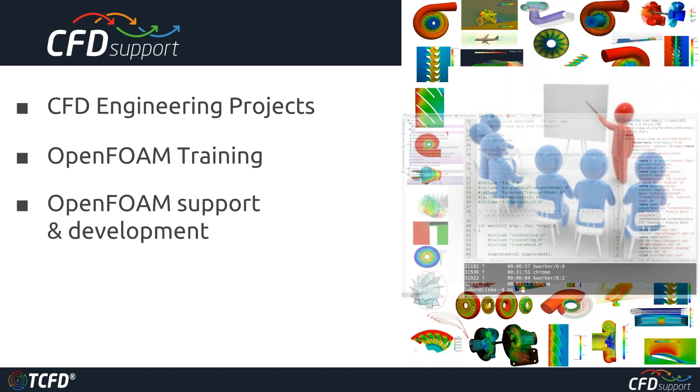Quickly about CFD Support. CFD Support is a private engineering company dealing mainly with computational fluid dynamics. We are located in Prague, Czech Republic, and we deliver complete CFD projects. We do various projects on demand all across the CFD field. We also deliver extensive OpenFOAM training and consultancy, as well as OpenFOAM support and custom code development. And of course, our flagship product is TCFD, which this webinar is about. So this is just quickly about our company.

This brings me to TCFD. Please let me give a brief description. What is TCFD? TCFD is a comprehensive high-tech CFD code. It's designed to be a complete CFD workflow to cover all the engineering steps, from the pre-processing over the simulation run to the very detailed post-processing of the results. It's independent of any other software, and on the other hand, it's fully compatible with other software. For this reason, it can be easily integrated into an existing process chain in any organization.

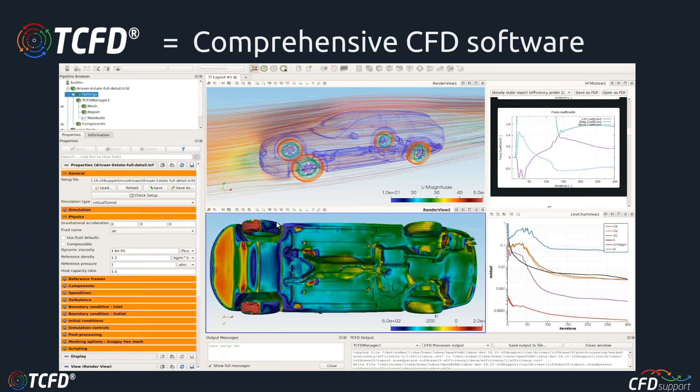So TCFD is unique CFD software, which is focused and unlimited. It's very progressive because it successfully merges the benefits of open source - it's perpetual, unlimited for users, jobs, and cores, and it's also very flexible and customizable - with the benefits of commercial codes, like professional technical support and graphical interface. It's robust, accurate, automated, well documented, well tested, and it's ready for the industry.

So the user can simply put the data in, TCFD does its job, writes down the results, and in the end the user can pick up the final report. So that's it - TCFD can be used either as a black box, or it can be used as a fully sophisticated CFD code where all the options are open. So the beauty of TCFD is it's the user who decides how deep to dive into CFD, or not at all.

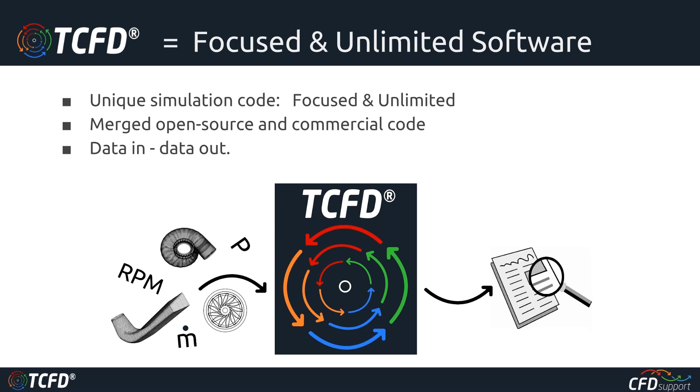About the applications of TCFD: TCFD is always focused on particular workflows by particular applications. TCFD's core business has always been turbomachinery simulations, both radial and axial machines, both compressible and incompressible fluid flows. So, for example, pumps, fans, also turbines, compressors, hydro turbines, and, for example, wind turbines, and many other kinds of rotating machinery.

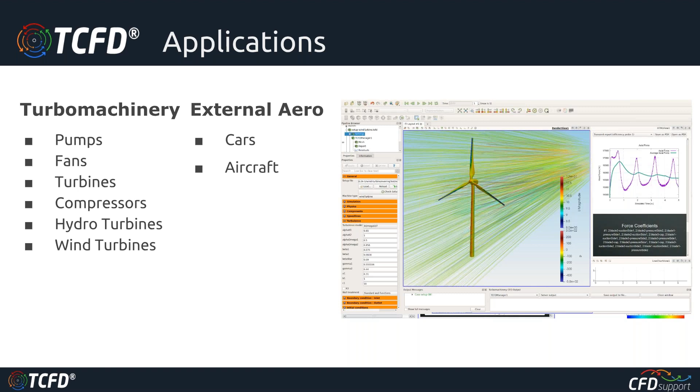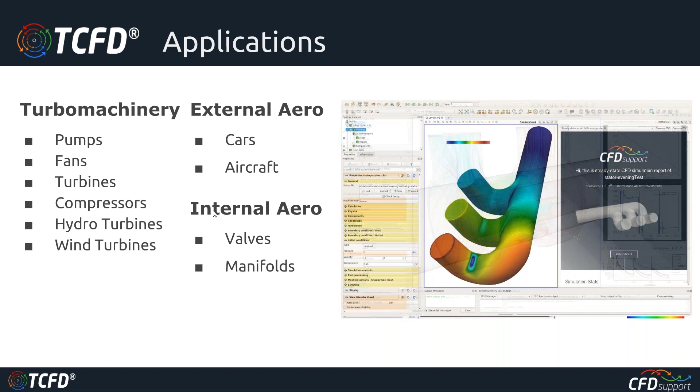Later, we decided to extend what had worked so well in turbomachinery to external aerodynamics. So now TCFD can simulate cars, aircraft, and many other external flows. It can also simulate internal flows like valves, piping systems, manifolds, and many others. And it can also simulate, for example, ship hydrodynamics like ship hulls with propellers. So TCFD is always focused on particular engineering workflows. That's very important.

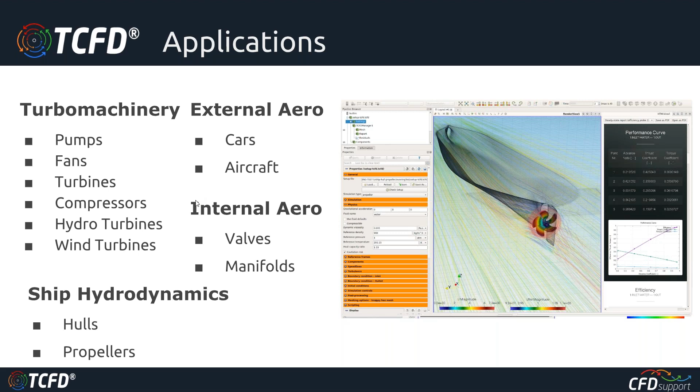Please let me stress just a quick review of TCFD's unique value. We believe TCFD is unique for at least these reasons. Number one, TCFD is unlimited, which means our clients can keep TCFD forever, and they can use it for an unlimited number of users, jobs, and cores. This gives the investment into TCFD a permanent value. So our clients can scale their CFD simulations in a really big way. TCFD is fully automated, so TCFD is extremely effective for this reason.

We have really good technical support, and real preset tutorials are included. Currently there are exactly 22 tutorials based on the real machines and the real projects we did in the past. So the new TCFD user has no doubts about the best practice settings and how to start. There are some other technical details. I will go quickly through them.

TCFD is available for Windows and Linux operating systems. TCFD has its graphical interface in ParaView, and nowadays 100% of the workflow can be done in the graphical interface. Of course, batch mode is available as well, so anybody can run TCFD in the background in batch mode. TCFD is also scriptable, so if someone wants to script it into big loops, it can be scripted in Python. Importantly, TCFD has its own automated meshing system based on snappyHexMesh, and external meshes can be imported to TCFD as well.

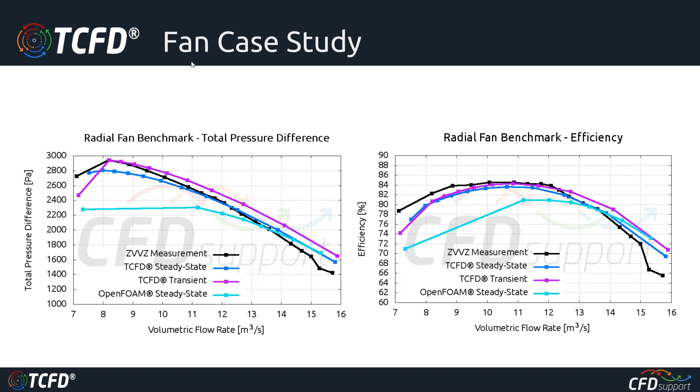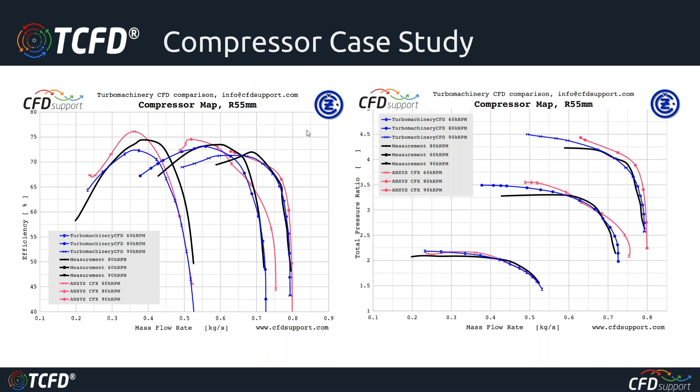So in the last year, TCFD has been extended with new applications. Recently, we made TCFD able to simulate external aerodynamics. We made a complex TCFD study of the DrivAer car. We found the CAD model and also the original measurement data to compare with the simulation results. The agreement with the measurement was very good, and the detailed PDF study again is available if you would be interested in details.

And finally, we have an optimization study. We did this study together with our German partner Friendship Systems, who developed their product called CAESES. CAESES is a flexible CAD platform for fast and comprehensive design studies with simulation tools. And together we made this study on a fan simulation

where the optimization study was performed. Many designs were generated in CAESES and simulated in TCFD. And as a result, we've got an optimized fan model with higher efficiency. The detailed PDF paper is available on request, so feel free to ask for it.

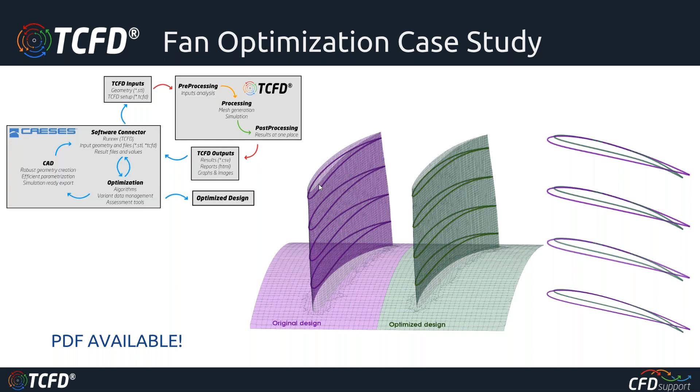And yeah, so here we go. Now it's time for a live example and new 18.10 version capabilities. So Radek, are you ready? Can I hand over the presentation to you? Yes, I'm ready. So you can pass me the presentation, show my screen.

Okay, so thank you, Luboš, for a very nice overview of TCFD. My goal now is to introduce you the biggest news in TCFD 18.10. I hope you can see my screen, and if so, let's start the second part of this webinar. So what is new in TCFD? With this release, we are officially entering external aerodynamic simulations. For this purpose, a new simulation type, virtual tunnel, is available. Additionally, we present a new tutorial, which is called DrivAer, showing the best practice setup for typical external aerodynamic simulation.

Over the last years, we registered significant demand for multi-rotor simulation. Therefore, we have developed a new framework for multi-rotor simulation, which is set using the reference frames section. And we added additional features such as axis of rotation visualization, which helps the user to manage the setup of several rotors. And of course, we provide a new tutorial describing the best practice setup for multi-rotor simulation, which is called the double rotor axial fan tutorial.

We have improved the simulation reports. Users can now individually set sections to appear in the report, so they can choose sections or quantities in which they are interested, and the report or reference quantities can be checked and afterwards appear in the final report. And finally, the improvement of the reporting lies in adding aerodynamic forces and coefficients, which are now automatically evaluated and reported.

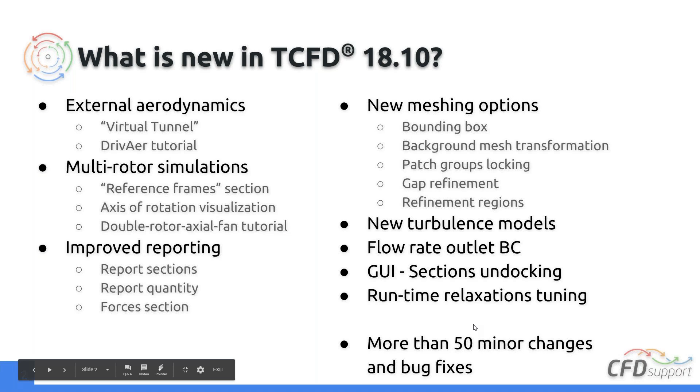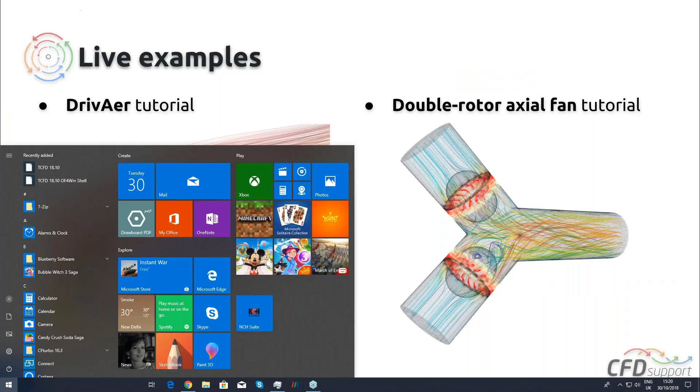Okay, so during this presentation, I will be switching between these slides and live examples in TCFD to really see that it works and it is really implemented. I'm going to demonstrate some of the new features on these two tutorials. The first one is the DrivAer tutorial for external aerodynamics, and the second one is the double rotor axial fan tutorial representing multi-rotor simulations. So I will be switching in this way. Sorry, not in this way. So this will be the DrivAer tutorial, and here I have loaded into TCFD the multi-rotor double rotor axial fan tutorial.

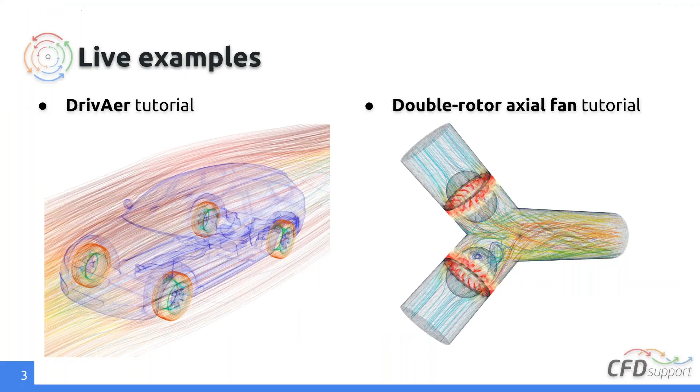So within the new release of TCFD, we have introduced 3 new tutorials. One of them is this DrivAer tutorial showing a typical example of external aerodynamic simulation. The DrivAer model was developed, measured, and studied at the Technical University of Munich. The CAD geometry is published at these web pages and can be downloaded for independent studies. So therefore, there are many studies and real measurements perfectly suited for validation studies.

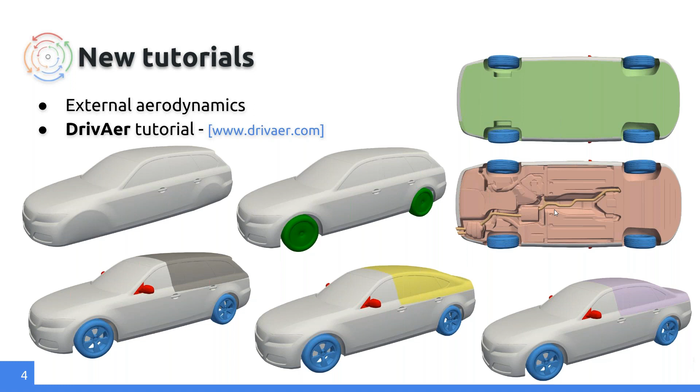And moreover, many variants of the body are available as well, so the solver and the software can be really deeply tested. So for example, there are many body shapes like estate body, fastback, and notchback. You can combine any part. So you can, for example, use a smooth underbody or very detailed underbody with the exhaust system, as well as choose the smooth tires or really real shaped tires and so on. So this is a very nice and playful tutorial.

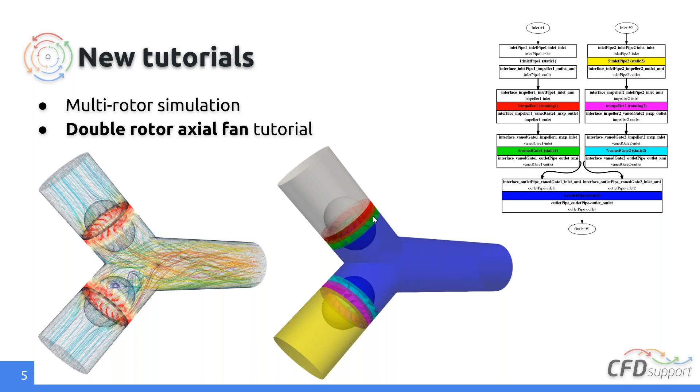Well, the second tutorial is focused on the multi-rotor simulation. It consists of two rotors, two stators, and 3 piping sections. So quite complex geometry, showing that really complex geometries with unlimited number of rotors can now be simulated in TCFD. And the last is an example of internal flow. It is a simple hydraulic valve tutorial showing the ability of simulating internal flows.

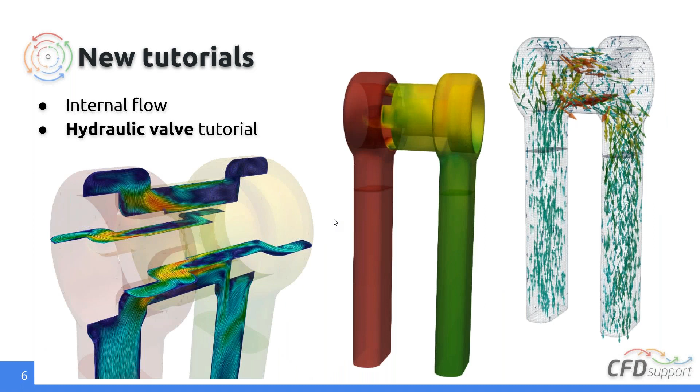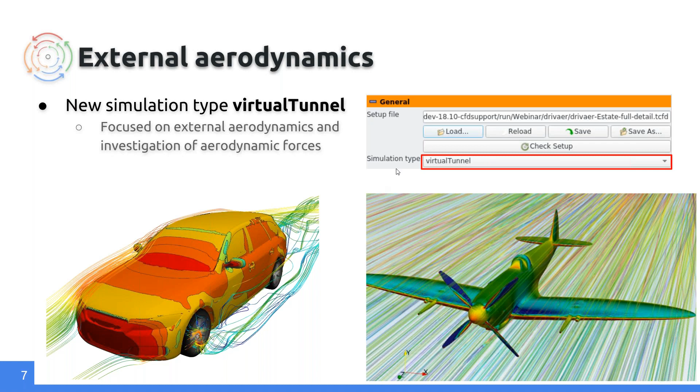Okay, so let's start with the external aerodynamics. What is new? I'm going now to introduce these new features one by one. So first one is the new simulation type called virtual tunnel. It can be used for investigation of aerodynamic forces acting on any object, so typically in car industry, aerospace, etc. So this new workflow gives user all the tools needed for successful CFD simulation.

So therefore we developed new meshing options. We implemented unlimited number of rotating regions. So it means for cars, for example, that rotation of car wheels can be simulated as well now. We tailored the evaluation process for evaluating aerodynamic forces, and of course these forces will then appear in the reports.

So just simply go here. So this is a TCFD graphical user interface. All the setups can be done using these sections. And for example, the first setup you should do when you start setting up the case is to choose the simulation type. So for this external aerodynamics, we will choose now, for this case, virtual tunnel, for example.

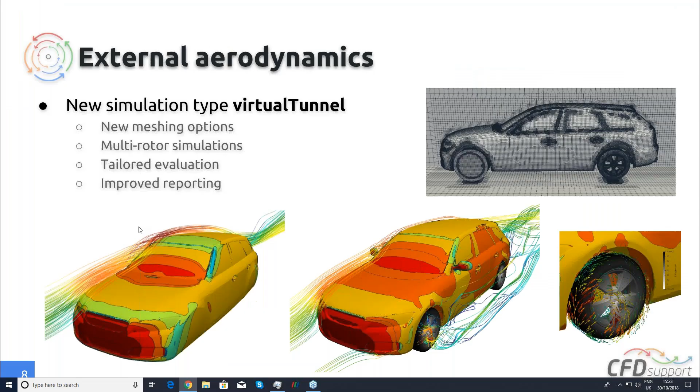So the next big feature which is implemented is the new multi-rotor simulations, which brings unlimited number of rotors with different rotation speed and axis. The rotation is applicable for both steady state and transient simulation. And the key part of the setup is the reference frame section. This reference frames approach defines each frame, which holds the information about the axis of rotation, or in case of the static segments, the rotational transformation of the segment, and of course the rotating speed of the particular part of the geometry.

So inside the GUI, inside the TCFD source, we can find a new section which is called reference frames, in which we can define as many reference frames, rotating or stationary, as we need. For better frames management, of course, we developed automatic axis of rotation visualization. So anytime you click on any frame, the axis will be visualized.

So let's see how it works. As you can see here, we have the new section reference frames, in which we can define as many reference frames as we want. For example, here we have 2 rotors, this pink part and the red part. So frame 2 represents the rotating region, so I can define the name, axis of rotation, point on the axis, and check if this frame will be rotating and at which speed it rotates. Anytime you change something, you can see how the axis looks, which makes the work with TCFD very, very easy.

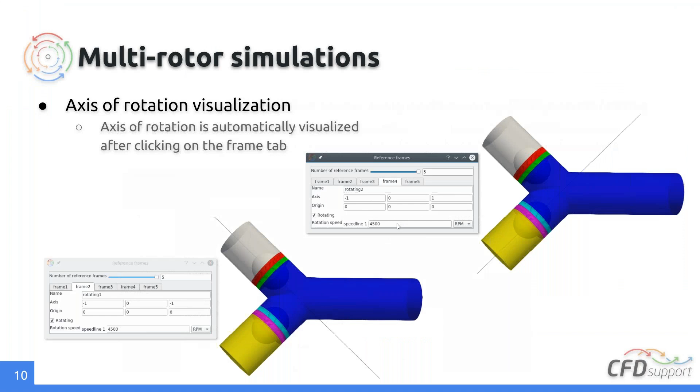Okay, let's go back to the presentation. So when the reference frames are preset, then in the component section, the frame has to be assigned to the components, which basically defines the rotation of the whole component. The frames have to be also assigned to patches, so you can define both rotating walls in non-rotating components and non-rotating walls in rotating components. So it gives you really high complexity in defining the case.

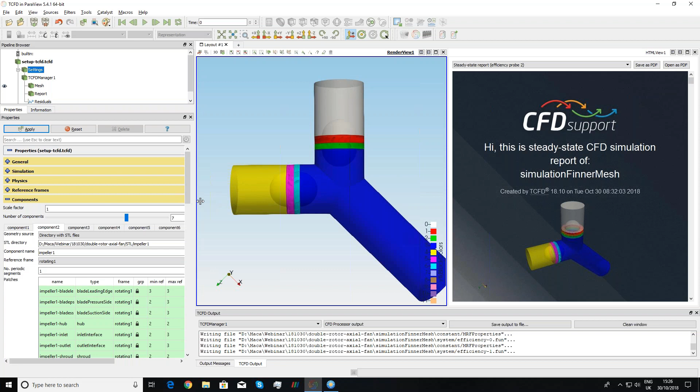So it is depicted here, but we can show how it works live here. So basically for each component, so here we have several components. So for example, component 2 is this rotor. This rotor here, by the reference frame, is assigned to the rotating frame with the name rotating 1. And of course, all the patches are assigned to this rotating frame.

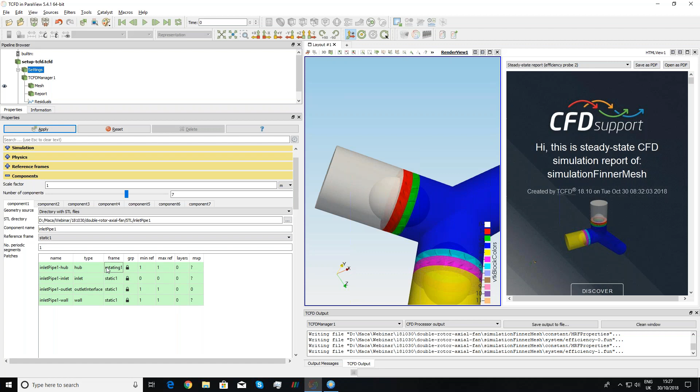For example, if we have a so-called unshrouded rotor part and the shroud is physically not rotating, we can assign this shroud to the static reference frame, and now the shroud is set to be non-rotating. And the same holds, for example, for component 1, which is here. So if we want to rotate this hub part from the rotor, we can similarly assign the hub to the rotating frame. So in this way, we can preset the case and run the simulation.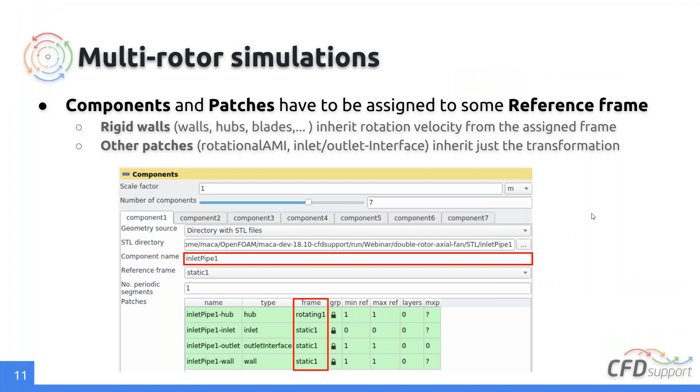So we implemented also several new meshing options. So in case you have no external mesh and you are going to create the mesh in TCFD, we created several new features. So the first one is bounding box, which is a new framework for defining a box-shaped computational domain without importing its geometry. So what does it mean? It means that you don't need any external STL files to define the virtual tunnel, let's say, or the boundary of your virtual tunnel.

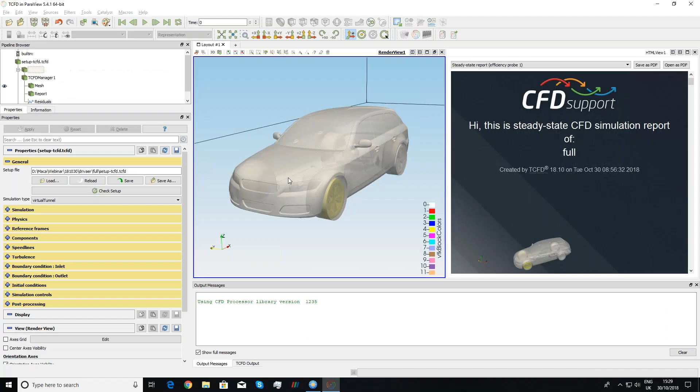So it can be set automatically. The bounding box is available for simulation types which simulate external flows, such as propeller, stator, virtual tunnel, and wind turbine. And what is nice is that the setting of the bounding box is interactive, so you can anytime see what you set basically. So if I go here, this is our setup, so I can go to the components part.

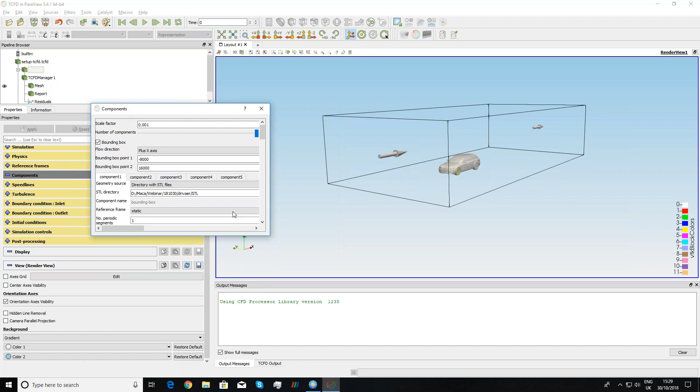So another feature which is implemented in the GUI: sometimes when you have a big and complex geometry, the menu is quite wide. So by middle mouse click, you can undock this section and have a separate window for the setup. Yeah, so you can really nicely adjust the windows to fit your needs.

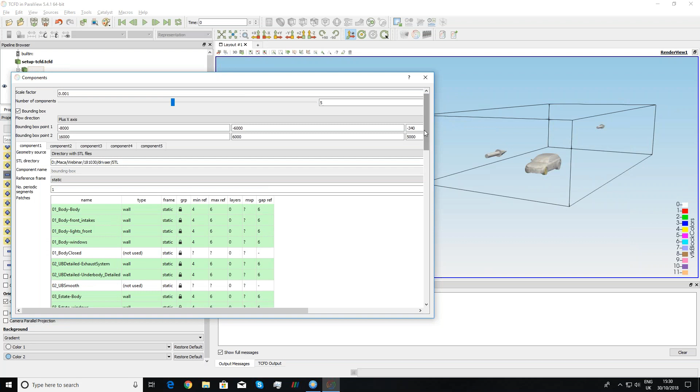And basically here at the beginning in the component section, here is the bounding box checkbox, which enables this bounding box setup. Then you just set the flow direction, so you can choose in which direction the flow will go. It is nicely visualized directly, so you are always informed what you set.

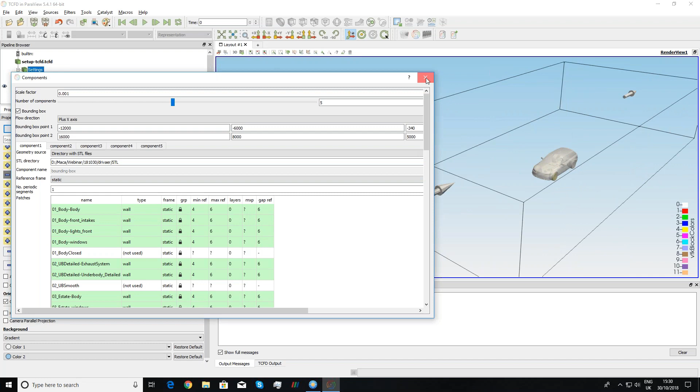And of course, the size or the dimensions of the bounding box are interactive. So if I would like to extend the virtual box, anytime I can really see immediately the shape of the virtual box. Yeah, so this is what we have here for the bounding box setup.

So the next one is the background mesh transformation. For better alignment of the input geometry, we have developed this transformation of the background mesh. For those who don't know what a background mesh is, the background mesh is an initial mesh for meshing. So it is good to align the background mesh properly with your input geometry, and this transformation allows this better alignment. A typical example can be presented on this double rotor tutorial, where the axis of rotation is not aligned with the main XYZ axes.

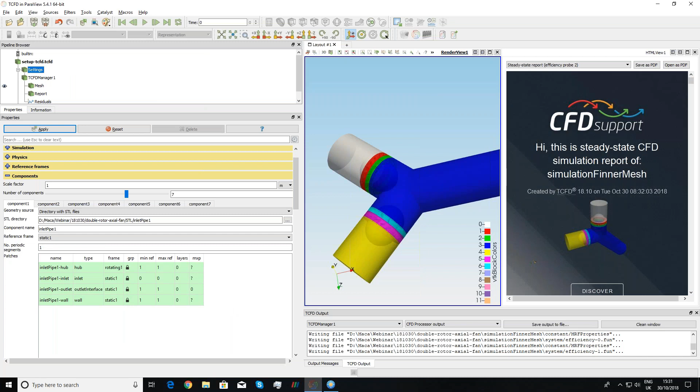So if I go to our tutorial, inside the component section here we can enable this show background mesh, so we can see it is preset correctly, and this advanced rotation is available in advanced mode, which can be enabled by this button. And now there are 3 slide bars or 3 values of the rotation in the Eulerian approach, let's say.

So if we change this beta angle, so this is let's say the default value, which is not nice for this shape of the geometry, so we can really nicely align with our input geometry. So this is a very nice feature, and it can also be applied for cylindrical background meshes, to really align the background mesh with your segment.

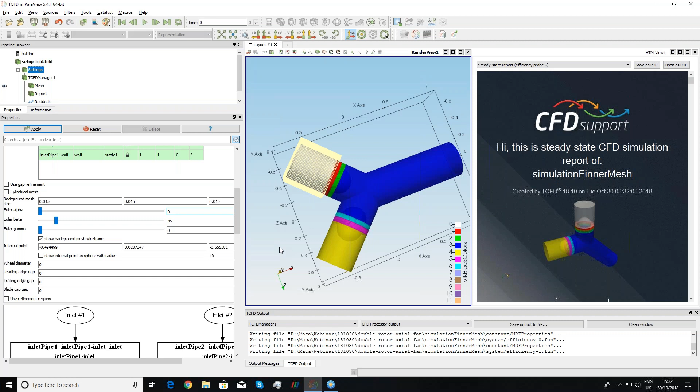Okay, so what is next? The next one is the patch groups locking. So in the previous TCFD versions, the patches of the same type always share the same levels of refinement. So levels of refinement means how fine the final mesh will be. So the new version allows to set the levels individually for each patch without any restrictions.

So it can be done by unlocking the patch and basically set the values. So just to show, for example, now we can go again, let's say for this DrivAer tutorial. So we can see here that all the parts of the car are set as a wall, of course. And now I would like, for example, to change the mirrors. So I would like to make mesh finer at the mirrors part.

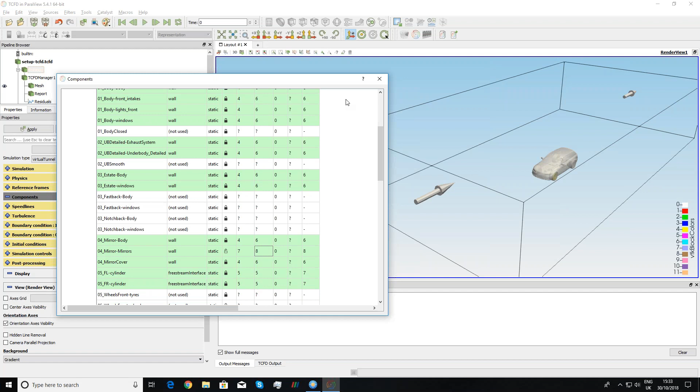But in the old version, if I change here, it changes for all the types wall. So I wasn't able to do this. But now if I unlock this patch, then I can use any number just for this particular patch. So which is also a very nice feature. So now the meshing is much more complex than ever before.

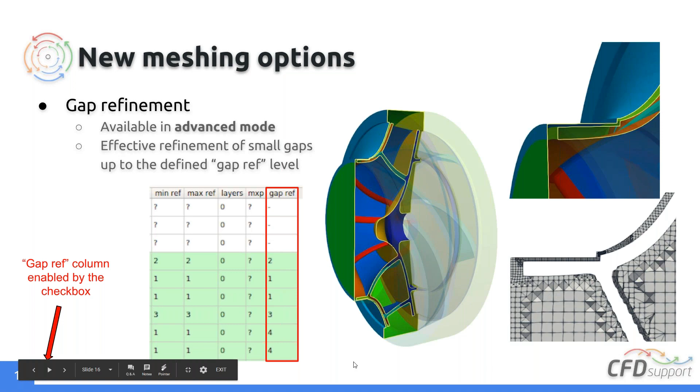Another feature is the gap refinement. So again, it is available in advanced mode. It is used for effective refinement of small gaps up to the defined gap ref level. So if you enable this gap refinement, okay, so maybe I will go here. So if I go for components, here in the advanced mode again, of course, is the use gap refinement, and then a new column appears in this patch list, and you can basically increase this number to really make a mesh finer in small gaps, which is again visualized here.

So a typical example is to mesh a leakage passage, for example, for this radial pump. So this part is always problematic, and it eats a lot of cells to be meshed. So now, for example, if you have only one part of the geometry for the whole casing, then you can enable this use gap refinement, and then you can see that it uses the mesh refinement with respect to the size of the gap, which can save a lot of cells in the final simulation mesh.

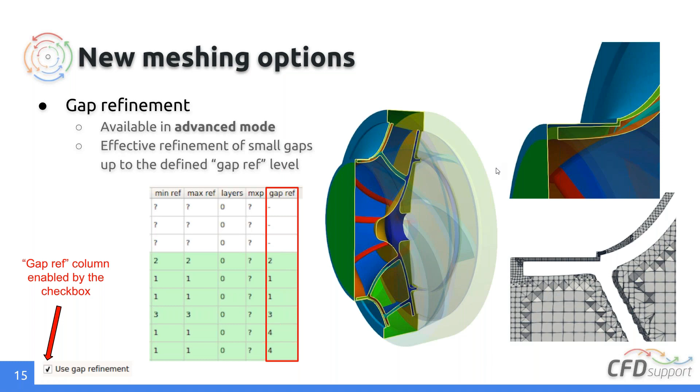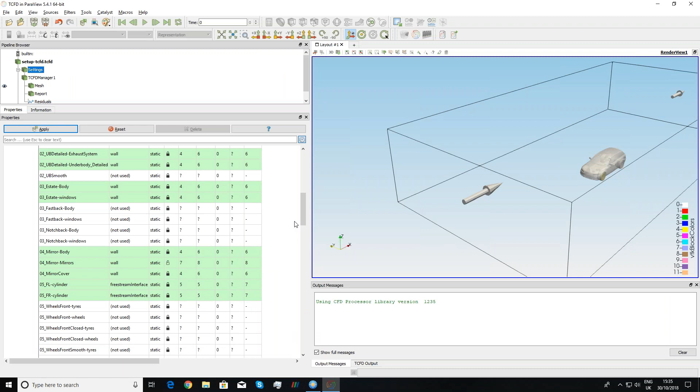And I think this is the last feature from the new meshing options, which is the refinement regions. So refinement regions feature allows defining a simple shaped region for mesh refinement. Typically one needs a finer mesh in the wake area behind the car body or around the whole object. So the user, by clicking on this checkbox, use the refinement regions, can enable as many refinement regions as the user wants. So again, we can show on this example.

So here we have 3 refinement regions with the box shapes, but you can also use sphere or cylinder. So basically you set the dimensions and the level of refinement. And then finally you can get something like this. So refine mesh around your objects and make the mesh coarser apart from your object. There are 2 modes, inside and outside: inside it meshes inside the object, outside it meshes outside from the defined object or defined region.

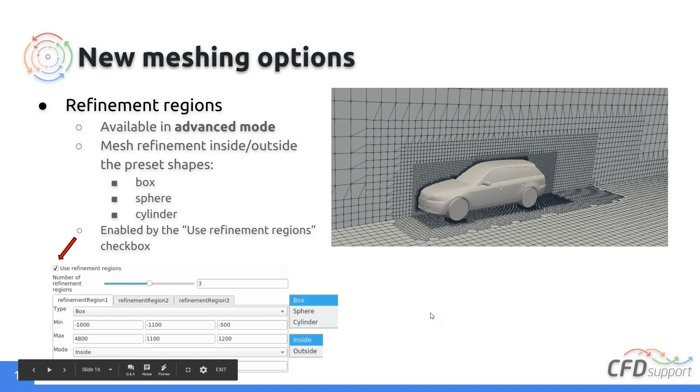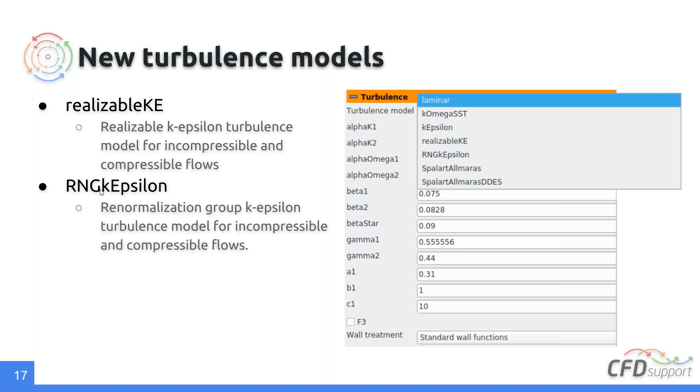Okay, so what is next? So we have introduced new turbulence models directly into the GUI. So now, beside others, you can choose the realizable k-epsilon turbulence model and RNG k-epsilon model, directly in the GUI. For example, you can go here where we have this turbulence, and simply you just choose the turbulence model you prefer. Again, you can also set these advanced parameters in the advanced option. So if I disable this advanced option, then you can see just the turbulence model and wall treatment.

Then we have implemented the flow rate outlet, a new family of outlet boundary conditions. So it is a mass flow rate, volumetric flow rate, and fixed velocity boundary condition at the outlet. Simply just go to the outlet boundary condition section and choose what you need. So for example, for pump or fan simulation, it is clever to set the volumetric flow rate, if you prefer, at the outlet and not at the inlet.

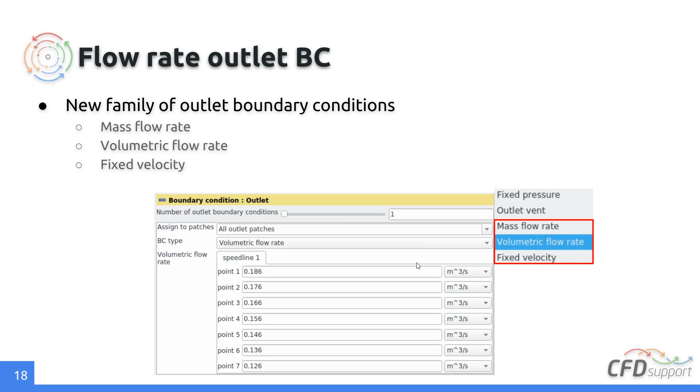Okay, and now we are going to the improved reporting part. So now in the post-processing section, the user can define their own section to appear in the report, as well as the report quantity. So if you enable again the advanced mode, then you can see these 2 new options, report section. So you just choose which section you want to see in the report, and the report quantity. So usually what appears at the x-axis and the reference quantity for the results.

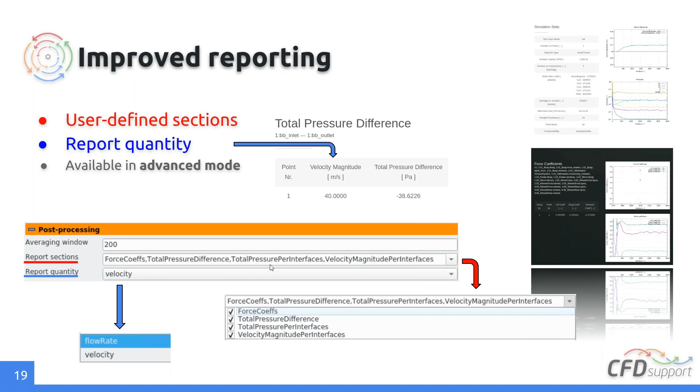And of course, new forces section, because of our external aerodynamics. So forces and force coefficients are very important. So now they are directly visualized and presented in the final report. So force coefficients, forces, and torques.

So we can show the setup and how it looks like. I have preset this final report for the car, and if I go to the setting part, to the setup part inside the post-processing, so basically our report section.

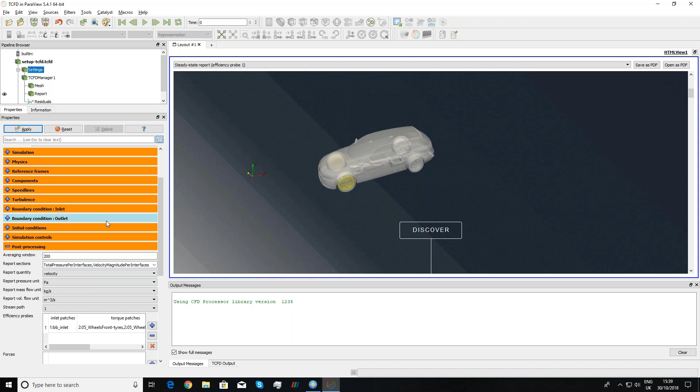Now all of them are chosen: force coefficients, total pressure difference, and total pressure per interfaces, and for example velocity magnitude per interfaces. The reported quantity is velocity, because at the inlet we of course set the velocity. So then it's a classical report in which we can see the force coefficients.

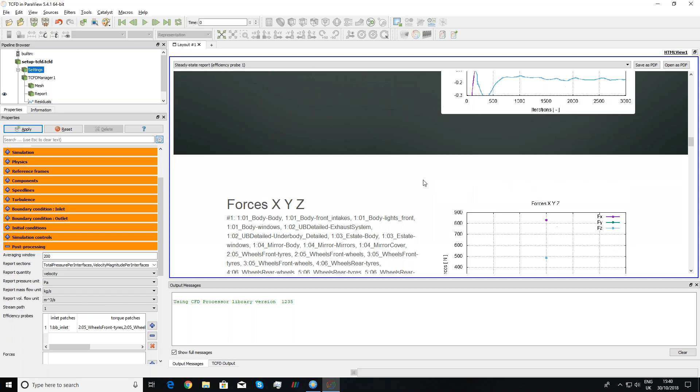The progression, or the evolving during the simulation. So we can also check the convergence, let's say, forces in each main direction, and of our torques or angular momentum along the main axis, and of course the other sections.

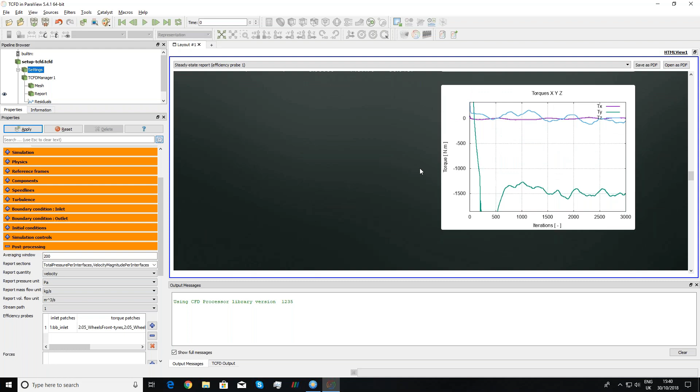So now everything is available at one place, and the same I can show you for the double rotor axial fan tutorial. So again, inside the post-processing, if I enable advanced option, we can see now that, for example, the report quantity is the flow rate.

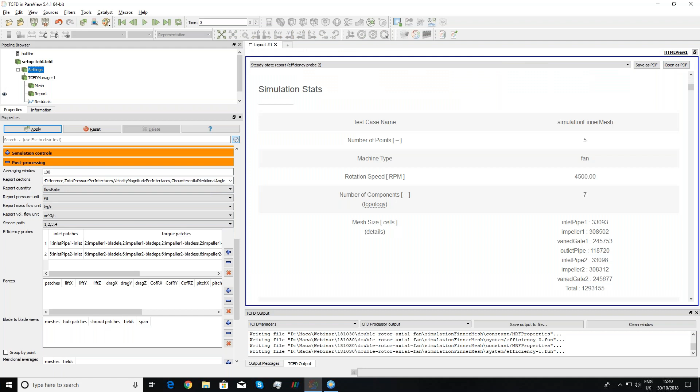So we can go through, and we can see that now for the reference quantity, what we can see here and here in the table are the flow rates compared to, for example, here when we set velocity magnitude. So here we have velocity magnitude as well as in these graphs. This is another option which can be managed by the user.

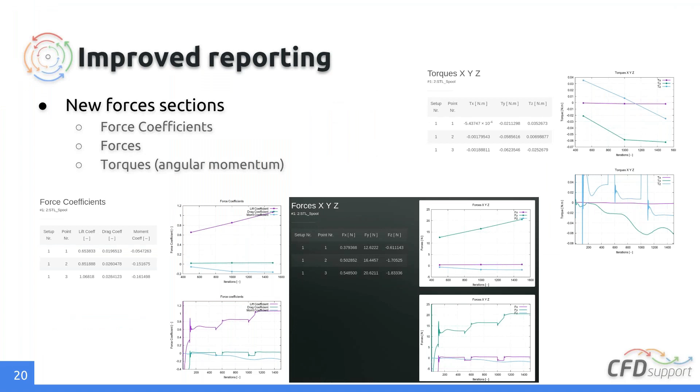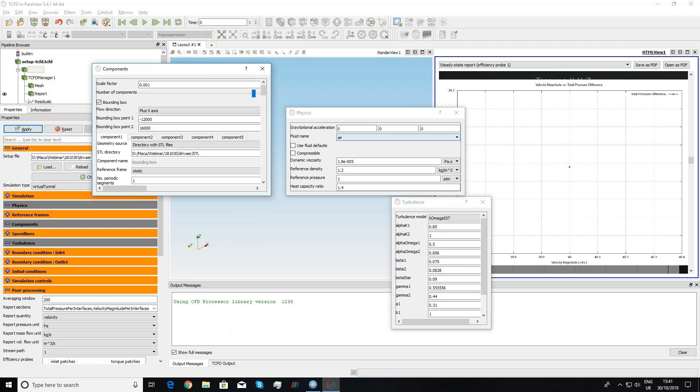Then this new section: undocking. Each section can be undocked by a middle mouse click, which I have already presented. For example, I need to undock these physics, components, turbulence, so I can really manage it here and not here in this properties menu. So a small feature which can be very handy.

And the last feature to be mentioned is the runtime relaxation parameters tuning. It is really an advanced feature allowing the user to change the under-relaxation parameters during the simulation. It is mainly developed for testing purposes or for tuning special cases. Therefore it is not recommended for final simulations, because when you change anything during the run, it is not noted anywhere, so it is hard to repeat the same simulation later on.

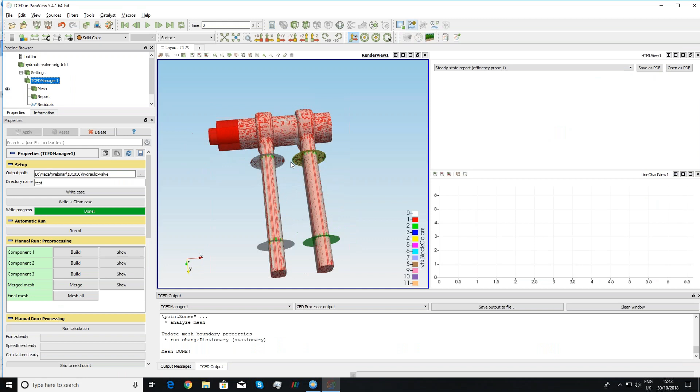So how it works - maybe I can go for the last tutorial, which is this hydraulic valve tutorial. To speed up the process, I have already generated the mesh, and this option is available in the advanced option. Yeah, so here we have this runtime tuning.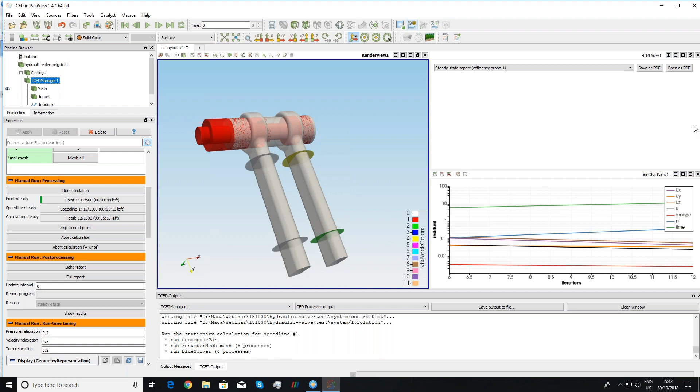So when I run the simulation, now the simulation is starting. Now here in this window, we can see the live residual.

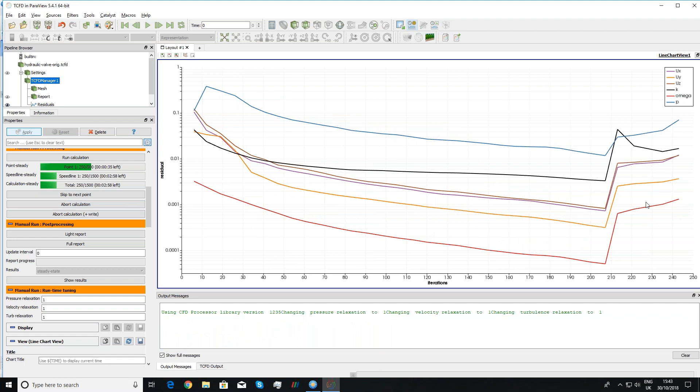And if I really would like to blow up the solver, for example, I can set this relaxation to 1. Anytime you change here, you need to apply - you need to click on this apply button to really apply these changes. Anytime it happens, you can see that the residuals go up. And I think after a few iterations, it blows up, and there is no convergence.

So again, if I go back to reasonably small relaxation factors or relaxation parameters, the result should go down again. So in this way you can really tune the simulation runtime, but this is really just for rare cases or for very fine tuning or for testing purposes.

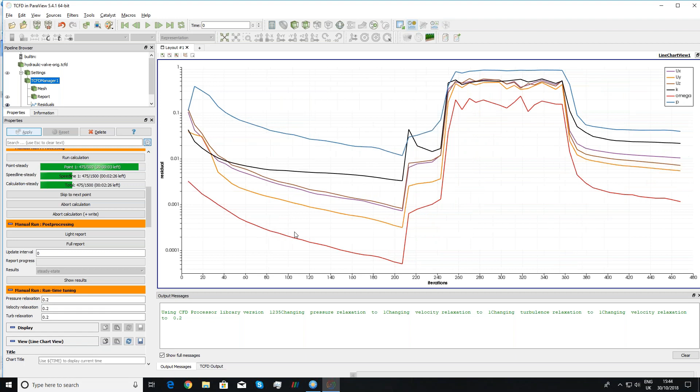Yes, I am, Radek. Thank you for a remarkable presentation. I'm gonna take my screen back.

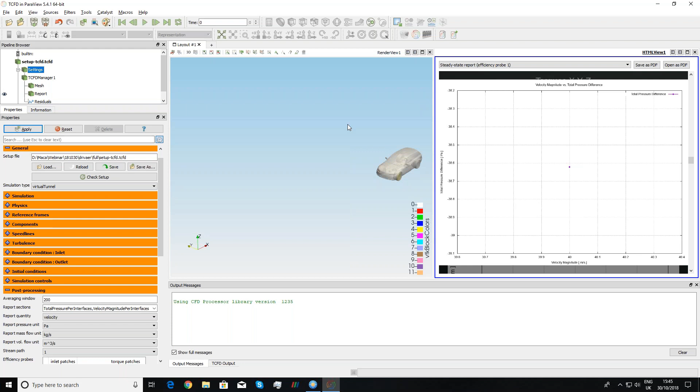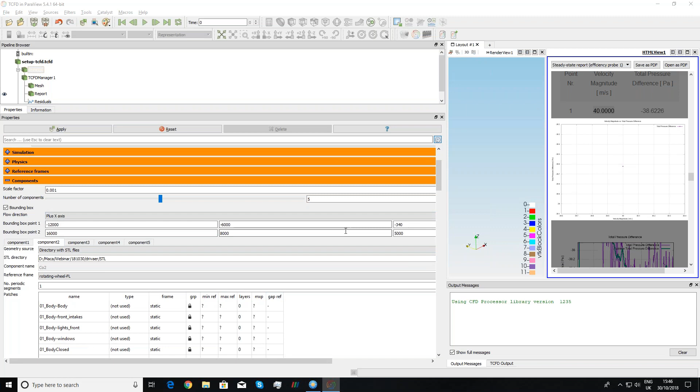One of the questions is which external mesh formats are supported. Let me share my screen and go through the components to answer by example. Here in the geometry source within the components, the external OpenFoam mesh is not so interesting, but the external Fluent mesh in MSH format, both binary or ASCII, is supported. I think 99% of any software can convert the mesh into MSH format, which can then be loaded here. So the MSH format of the Fluent mesh is supported.

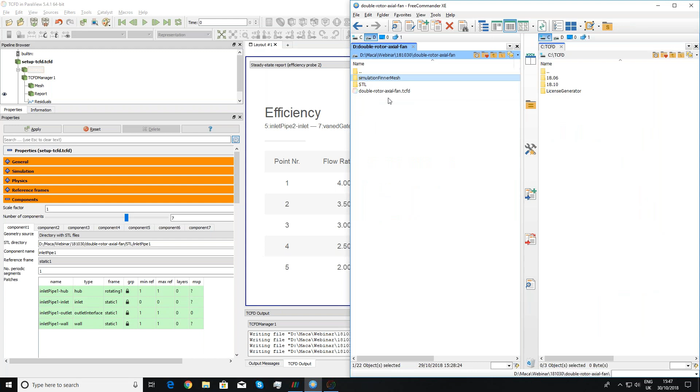Will all the new features keyword for the TCFD file be documented in the manual? We usually don't use the GUI for the case. Yes, of course, Marcus. The TCFD manual is already updated and includes all the new keywords, which can be used directly within the TCFD configuration file. Marcus pointed out he doesn't use GUI, but uses these configuration files to preset the simulation, then run in batch mode from the command line. So yes, it's already updated in the TCFD manual.

Maybe Eric, I can answer this one. Let me see the last one, and then I will switch to you.

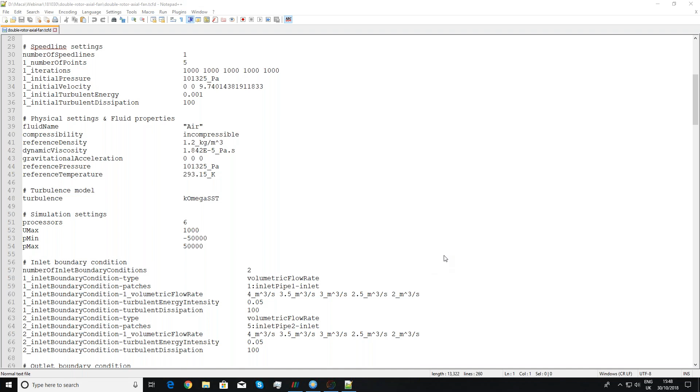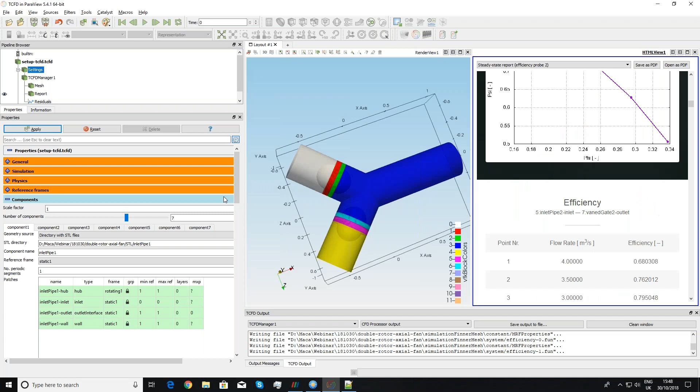There's a question about counter rotating fans: can I use the multiple rotor model? I would think I need to use a sliding mesh model. Well, it depends. If you can define disjoint rotor parts, a good example is this double rotor fan. For example, in this slide, let's say these are two rotors with counter rotation, so it can be preset. But if your rotating components are not disjoint, then this multi-rotor approach can't be applied. It can be applied to disjoint regions with no limitation, but if the regions of these two rotors interact, then it can't be used now in TCFD.

Okay, I think we can switch back to Lubos. Yeah, I think we are done. Philip is asking, hello, can you tell me where to find the release notes?

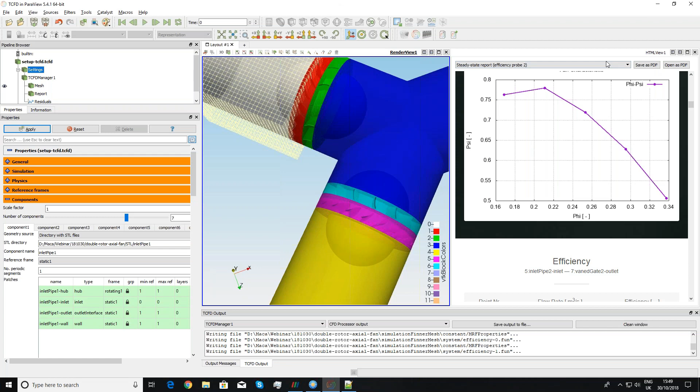Yeah, it's a good question actually. We will be in touch about this. This webinar is about the release notes, and we have a list we can send you. I will make a note and be in touch about this.

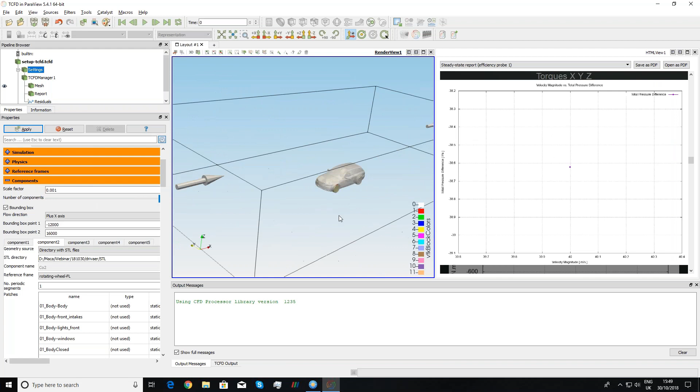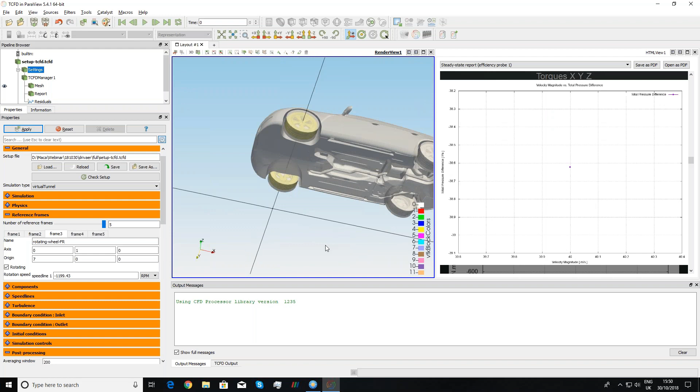The next question is, is there documentation for the tutorials? Well, the tutorials are available online in our download section, you can have a look. There are 22 tutorials available to anybody for download, and a kind of documentation because we have special case studies for each tutorial. These case studies, found online, serve as the documentation for these tutorials. Most of them, or the vast majority, have this documentation online. If you have any special detailed questions, feel free to contact us and we will send you the details if you miss some.

Okay, I can't see any more questions which are easy to answer. So I guess, Radek, what do you think? Yeah, I don't see any questions as well. So maybe we can conclude.